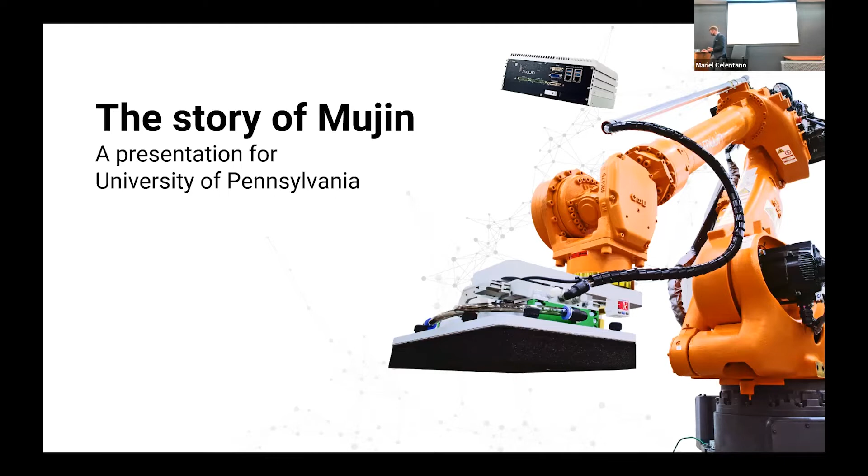Today I want to talk a little bit about what we do. Here's the list of things I want to cover today: what we do, what's Mujin, also our opportunities, and also I have some time for Q&A as well. Some of the talk is quite technical about some of the things we've achieved with robotics over our time. But again, feel free to ask questions anytime.

Just about us, we're a company that's really about making industrial robots for everyone - that's our goal. We're doing industrial robotics. Right now, the state of the industry is that these robot arms are decades-old tech. It's already been developed quite extensively. They're quite state-of-the-art machines these days, but they're not used very widely. So Mujin was founded as a way to make it easier to use these robot applications.

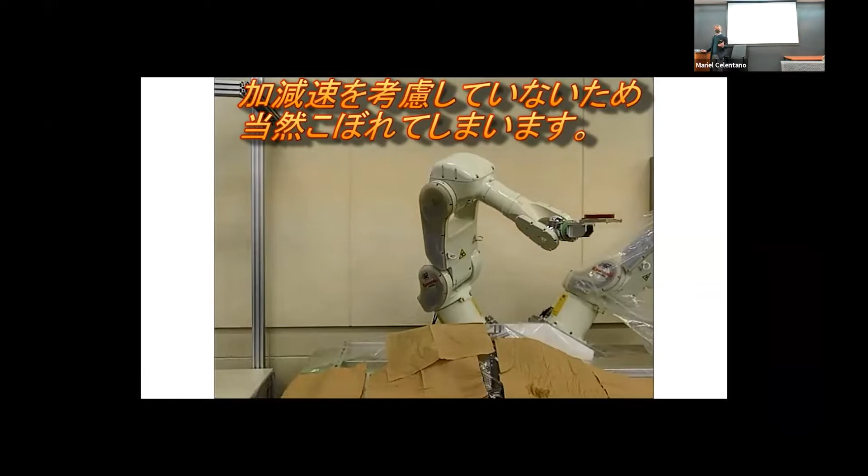This is the kind of application that we're doing. This is a prototype that we did based on the kind of software, the technology we developed. You see how right here, this robot is having a hard time moving this petri dish with water in it. But we were able to make a system - this is the way that we develop software - that can make it move like this instead. It's drastically different because our software automatically determines a motion path based on constraints.

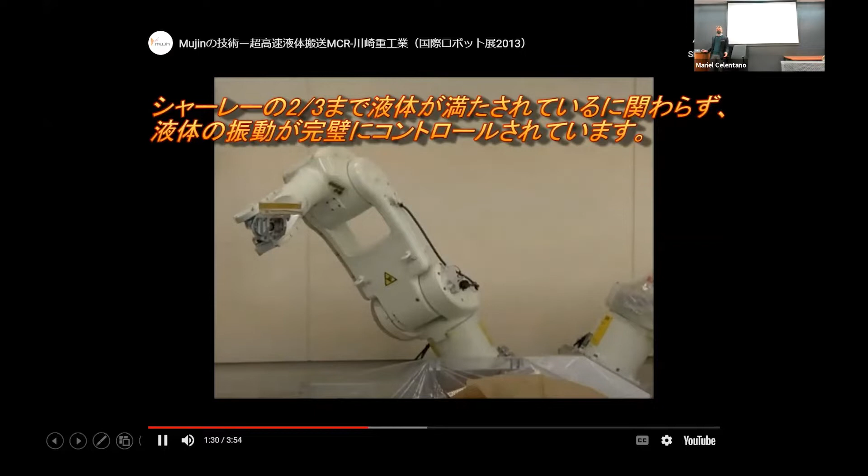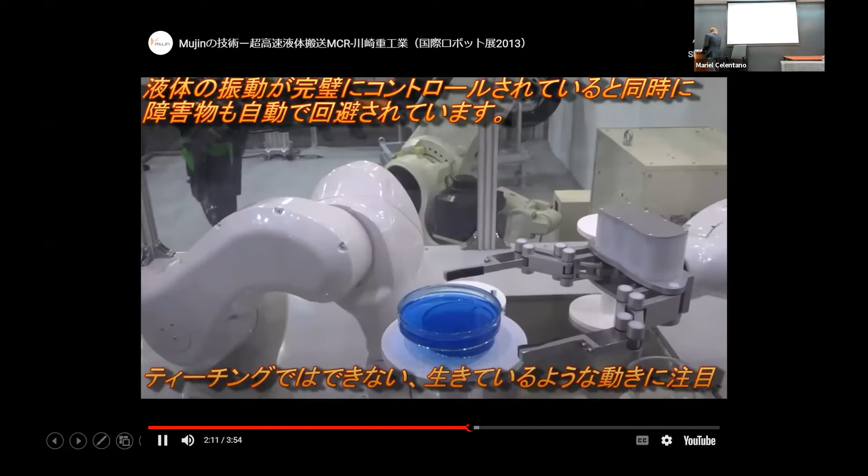So that's just a demo - we never really sold it or anything like this. But we're really about developing automation. This is kind of how we actually had it during one of the expos that we did in Japan, back in 2012, or actually I think it was 2013. But it just shows kind of what Mujin is really trying to do with our automation.

We've done other kinds of robots as well too. I want to move on to the next slide. But first, before I go into that, I want to give a little bit of background about our company.

We're founded in Japan, but founded by actually an American and also a Japanese person in Japan. The reason we decided to set the company in Japan is specifically because Japan's really strong with these industrial robotics systems. The types of applications we're doing involve using robot manipulators, and most of them - especially when we founded the company back in 2011 - about 70% of those manipulators were made in Japan at the time, across the world.

Just about Mujin, our company - the name Mujin has a double meaning. One means no people, and it can also mean no limits as well. That's a little bit about our founders. We want to be able to automate pretty much any kind of system that can be automated.

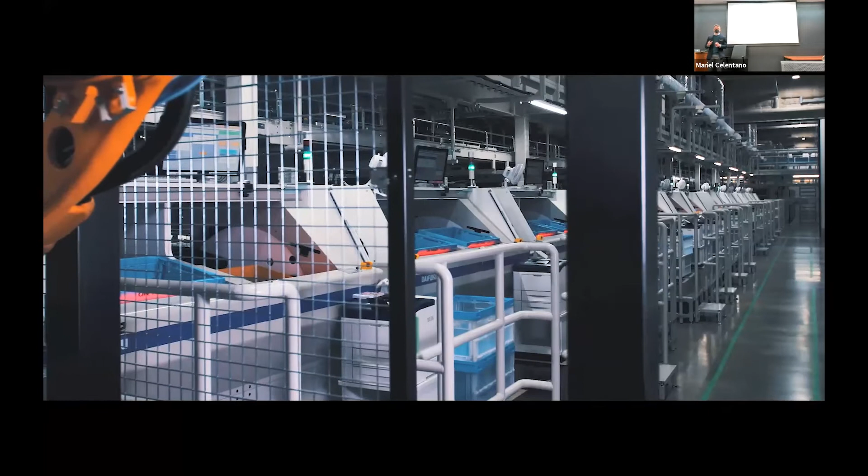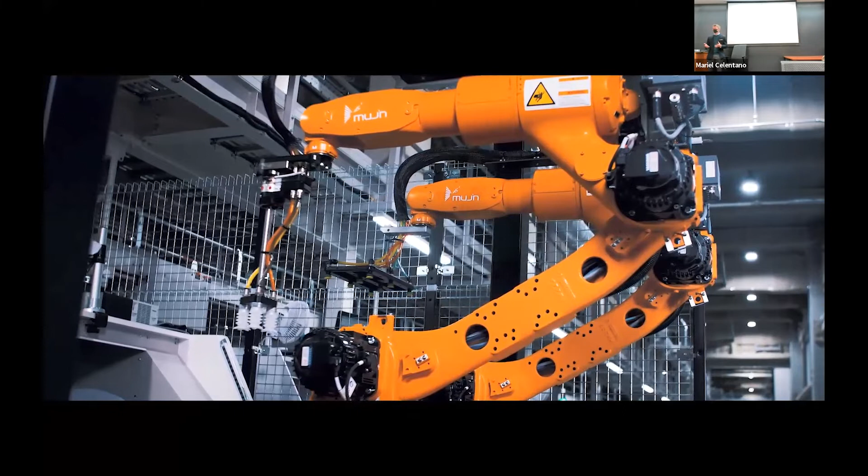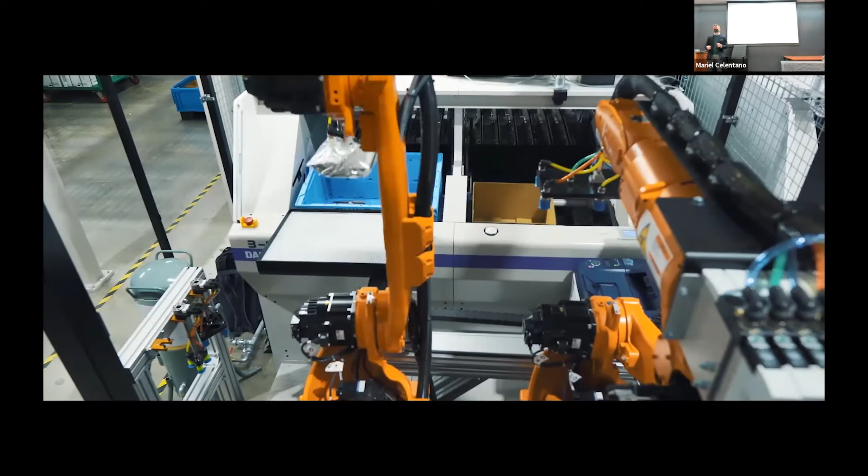This is one video that I want to show you about a type of system that we made for a company called Fast Retailing. They have the brand called Uniqlo, which I'm not sure if you have one of those in Pennsylvania or Philadelphia, but no, you don't have one? Oh, yeah, you do? Clothing store? Yeah, I've been there. You've been there, right? I have a vest from there. Awesome, so it's kind of a big deal in Japan - most Japanese people shop there.

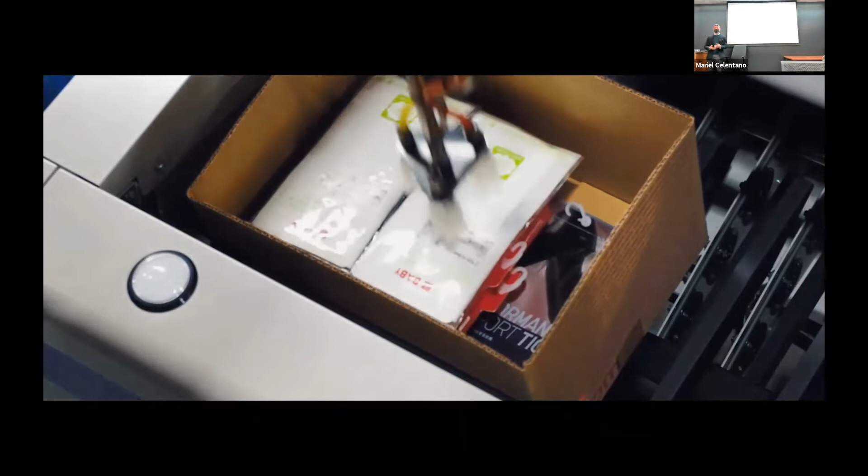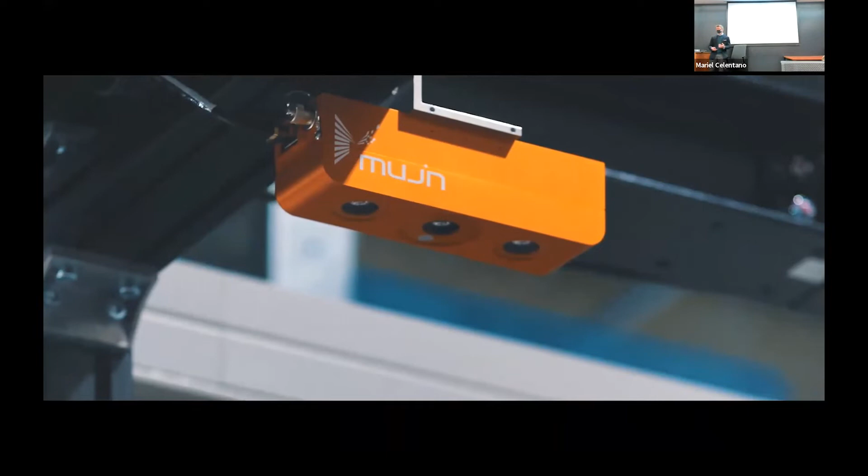They have this job of people having to pick up items in boxes for e-commerce - like you order online, you have to have somebody pack that order for you. So they wanted a robot that could do that job automatically, and we helped them make it using sensors and also the software that controls the motion planning. We've actually been making these kinds of systems for quite a bit, but that's one example of some of the applications we're doing.

Other ones as well too - we developed... yes, go ahead.

When you talked about the application to Uniqlo, like for binning the products that people order - does the automation only take care of it if you place the bins next to the robot and give instructions on what items and which order to make, solving all the scheduling and everything, and then it does the task? Or does it go to where the bins are placed in one place, goes to the bin, picks the right object, and comes back?

So yeah, the issue about bringing the actual items to the robot - that's one thing we've had to deal with. There's a lot of different systems we usually have to interface with, and it depends on the system too. But there's usually a warehouse management system that tracks what is in what bin, for example. And then there are automated conveyors or sometimes AGVs that bring the items to the robot.

What Mujin's platform can do is figure out how to pick up the items and pack them properly. And it can also control all of the automated systems, the industrial automation systems on the scene, including the AGVs and the conveyors, barcode scanners, and all these different sensors involved.

So let me show you this next video as well. Did you see our video about JD.com? It's a big e-commerce giant in China, and we helped them make a fully automated warehouse back in 2017 when we started that project, finished up in 2018.

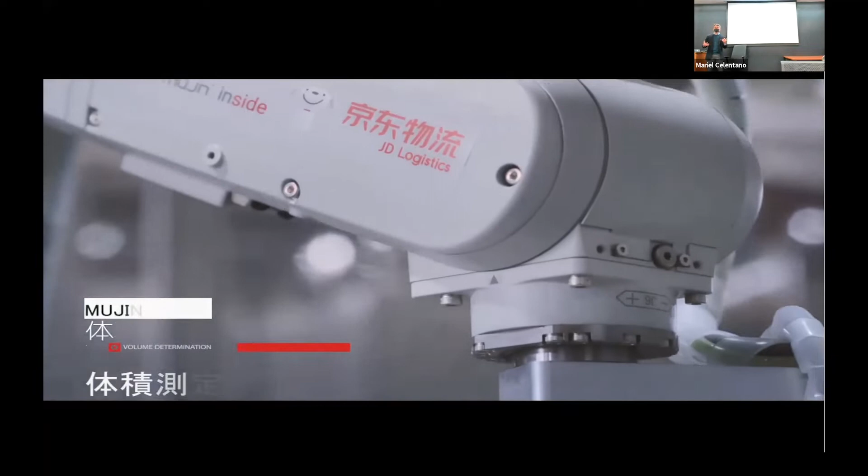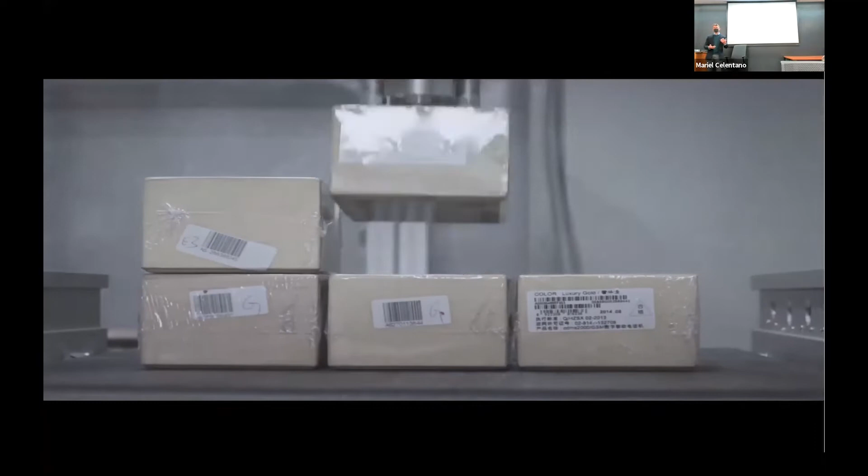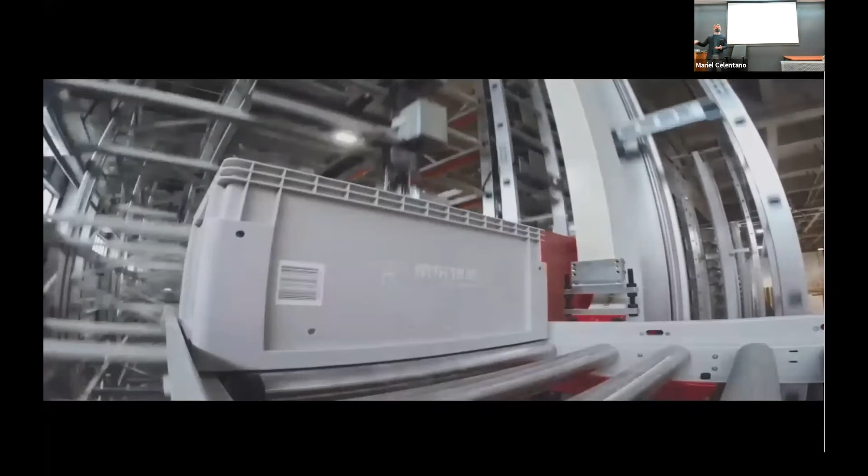This is what it is, a massive warehouse - see the video here? They were already planning on building it out with the latest kind of automation tech for storing all the items, the automated shelving, the automated packing systems, these kinds of things. What we provided was the robot arm that could pick up all the items, put them into the shelving system, take them out, scan them, and then put them into different workflows. So we kind of closed the loop around the automation for this.

Right now, usually this kind of task they were thinking they'd need about 50 people to actually do the packing. But by adding our robots, they're able to make it so nobody has to touch any of their merchandise anymore. So the only people working at this warehouse are 5 people doing maintenance on the machines. That's it - it's the most automated system I've heard of.

Yeah, go ahead. Oh yeah, this seems like a very different kind of system than what I've seen in videos about Amazon warehouses, where you have these small robots picking up racks, and then people have to pick things out and package them.

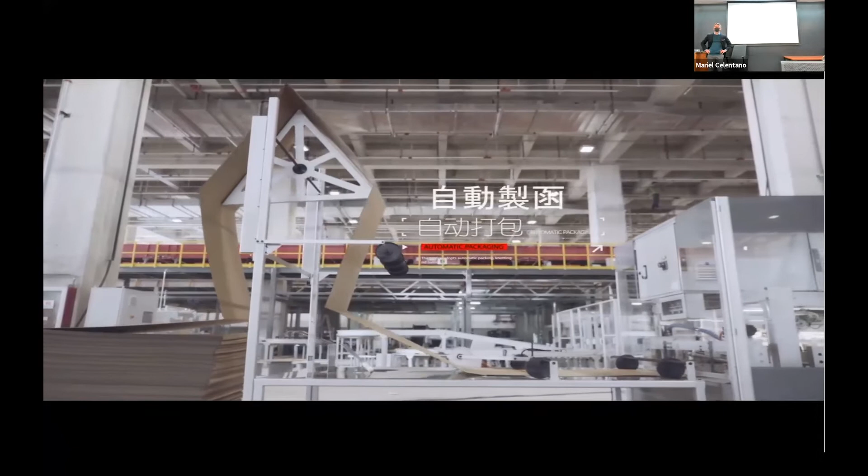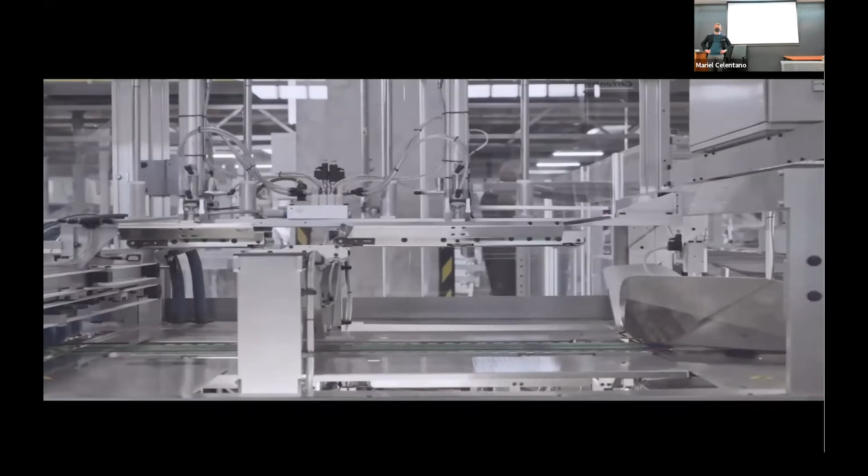Yeah, so what do you think are the pros and cons? I guess in my mind these are two approaches to this warehouse automation problem. So what do you think are the pros and cons of Mujin's approach versus building Amazon's system of moving the items and then having a person pick them out of the shelving, things like this?

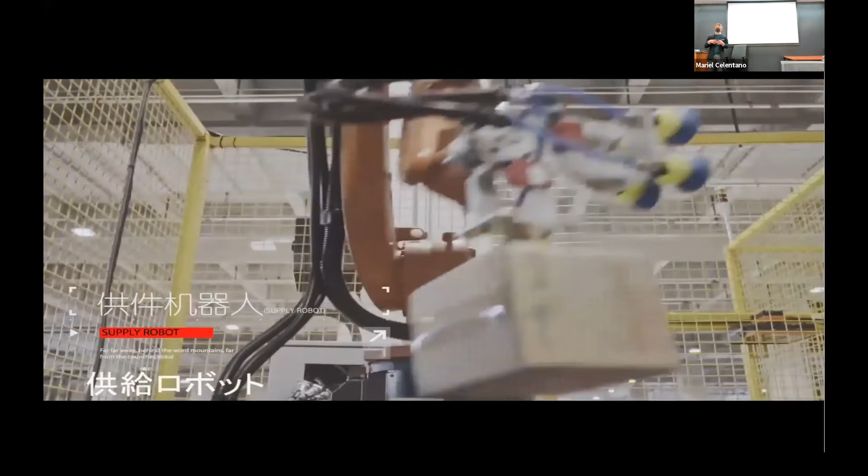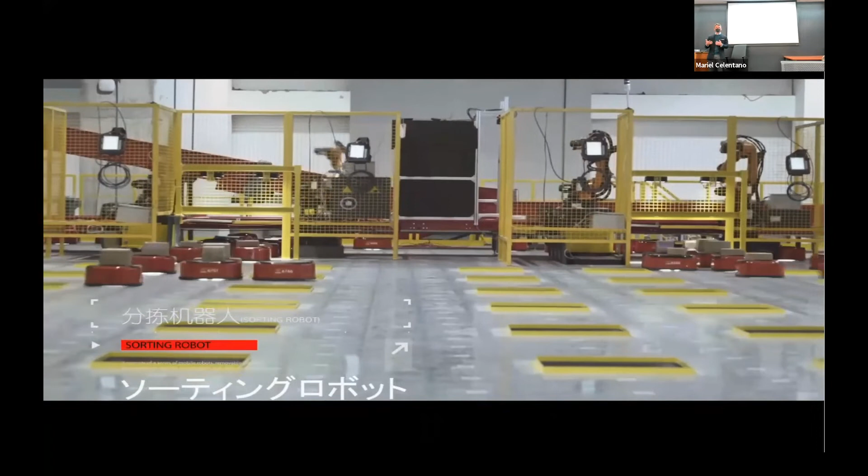I think maybe there's some distinction - for Amazon's system, I understand they have a very different idea about how they should actually handle the items in terms of where to store them, because they don't know where they're going to be shipped from and what's the closest destination. This is information I've gathered from Amazon's video too - I watched like a 20-minute video about what their automation center was doing.

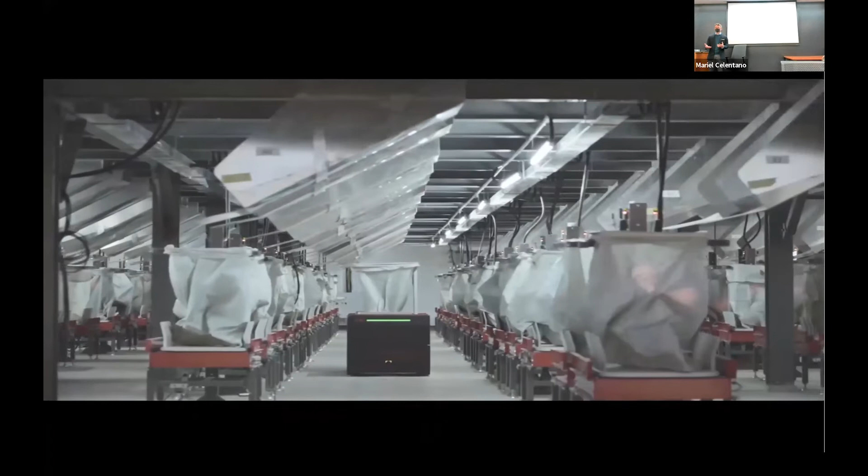Our main goal is to make the system as autonomous as possible, so we can find a way to make it so nobody actually has to handle any of these things - it's all done by machines. That's what we wanted to do. Actually, we didn't have that big of a part in deciding how this warehouse was made. What we were in charge of was just providing the robot application that would make it so they could take those last 50 people out of the process.

So if you think about Amazon's system, right now it brings the rack to a person who will pick and then pack. If we could have Mujin in there, it could do the picking and packing as well. But the automated storage system, that's something really different from what Amazon came up with, right?

Yeah, I don't know that much about the pros and cons. It's a little bit - we focus on the robotic side of things more than the warehouse management side of things.

Any more questions about that one?

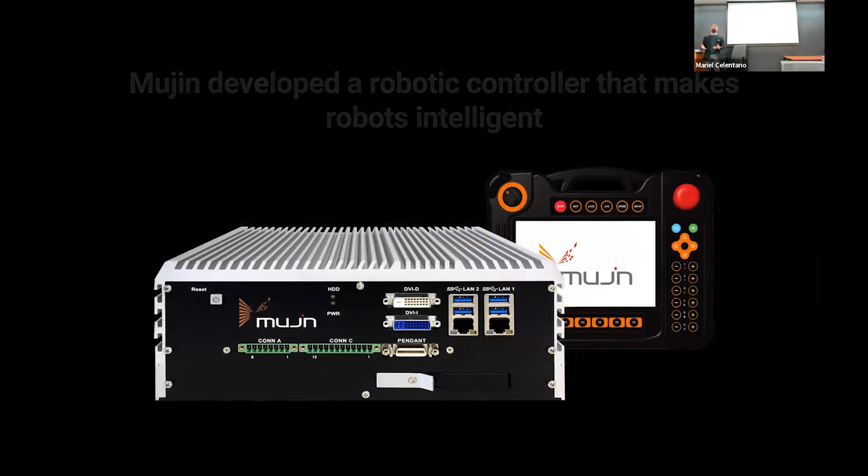Let me go on to the next part, about Mujin, what are our products? I want to go over that a little bit. The reason I go through this is because I know you may know a lot more about robotics than the average person, but I do this presentation for lots of different audiences, and they want to understand what it is that Mujin actually makes.

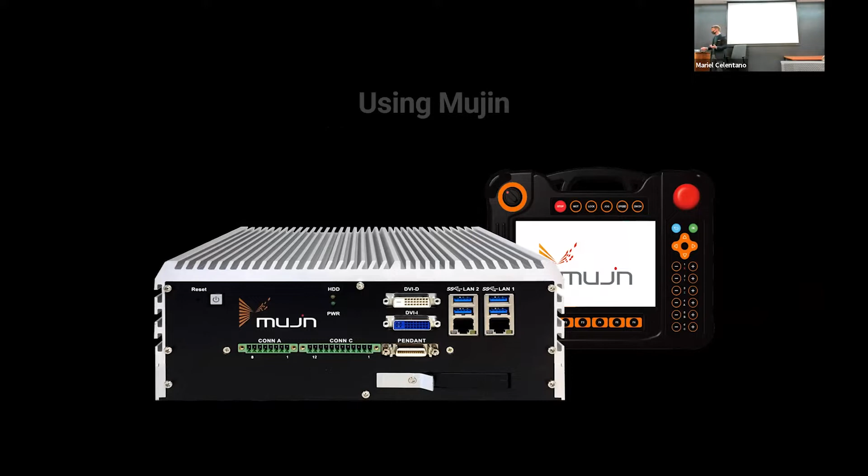What we actually make is a controller that we're able to connect to any kind of hardware, and also automate the systems that are on site. Essentially it can be the brains of the robot, so that it can decide by itself how to do it, and it uses sensors as well.

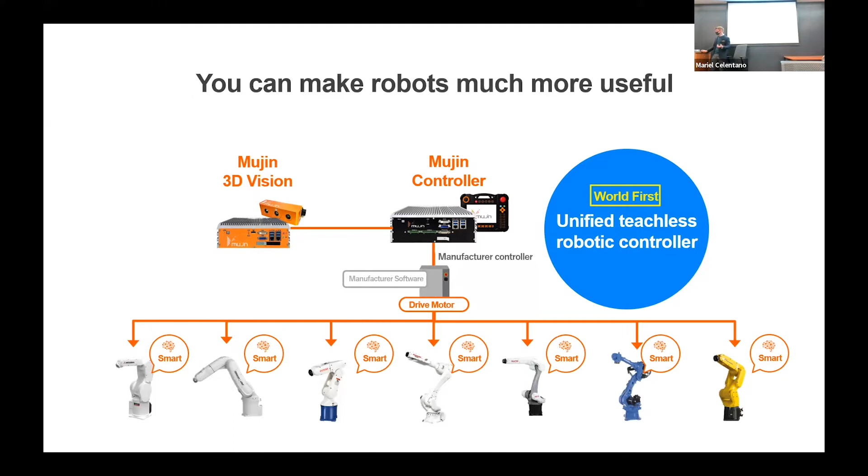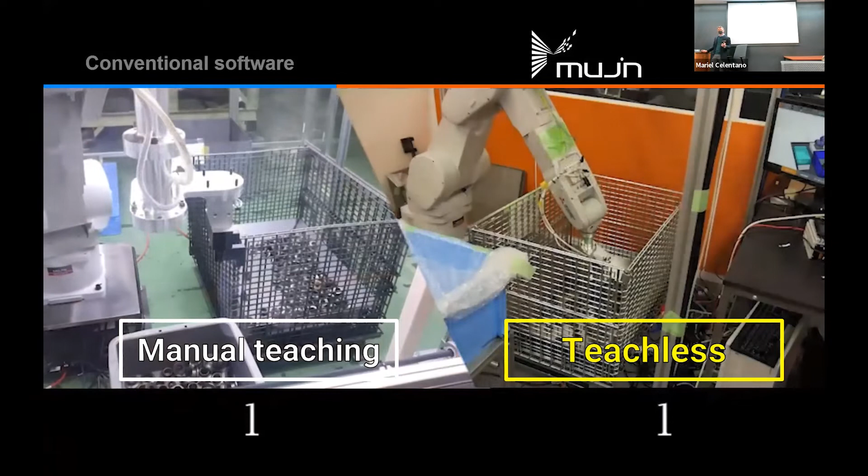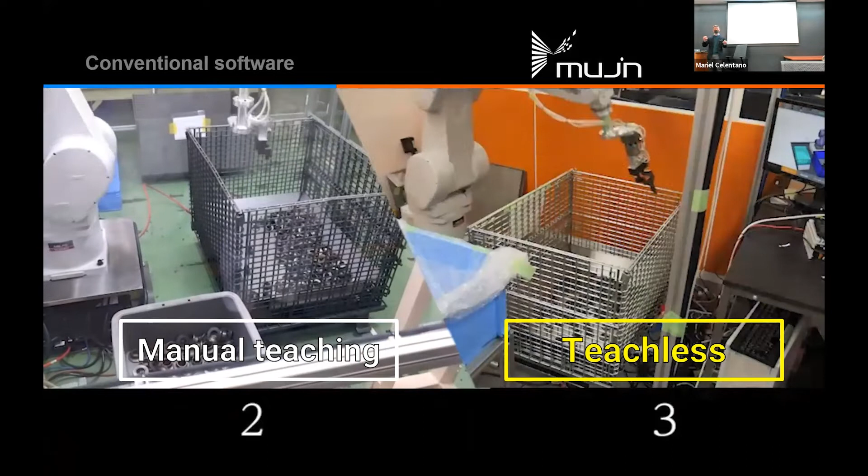The key thing about how we automate the robot manipulator is that we use this technology called teachless. If you're in the industrial automation industry, what people are actually doing to make these robots work is they'll program the robot to move from point A to point B, grasp something, put it down over here, or move the robot over here, make a weld, these kinds of things.

Maybe you've also seen with cobots, you can sometimes do that just by pressing record, moving the robot, pressing stop, then pressing play, and it'll just keep doing it again and again. So what our system is able to do is provide better performance than these traditional methods of robotic programming, because of the algorithms we're using, and that's the reason why they're faster. We call that technology motion planning.

So when you talk about these algorithms you use, is there reinforcement learning or some kind of learning involved in the design, or is it more of a theoretical, control-heavy approach? That's a good question.

Our system is actually a model-based control system. Of course we're simulating everything, and there are some reasons why we don't use so much machine learning in our system right now — I can tell you more about it later. Maybe as I talk more you'll understand a little about the challenges we have to solve and why we chose not to use machine learning for the majority of things. Having said that, we do use a little bit of it, but not that much.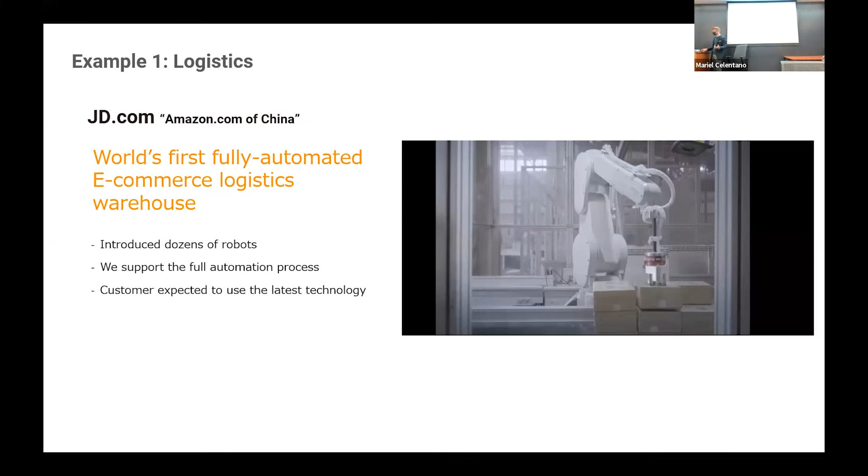So this JD.com example is one — I explained a bit about the benefits that provided. I also want to show you one of these applications that's selling very well right now, which is around palletizing and depalletizing. If you know what a pallet is in a warehouse, you put boxes on the pallet or take them off — that's what these applications are.

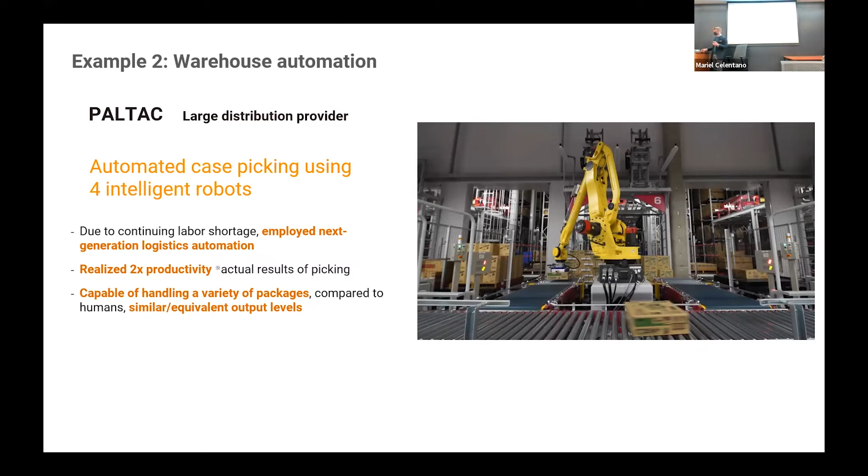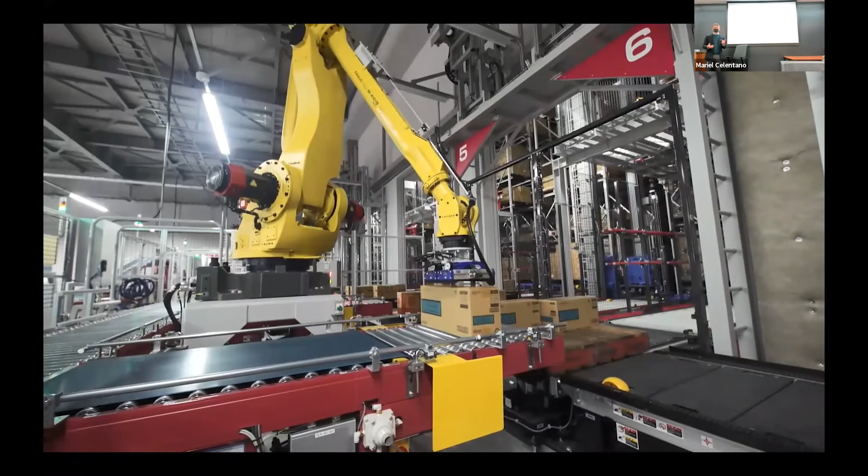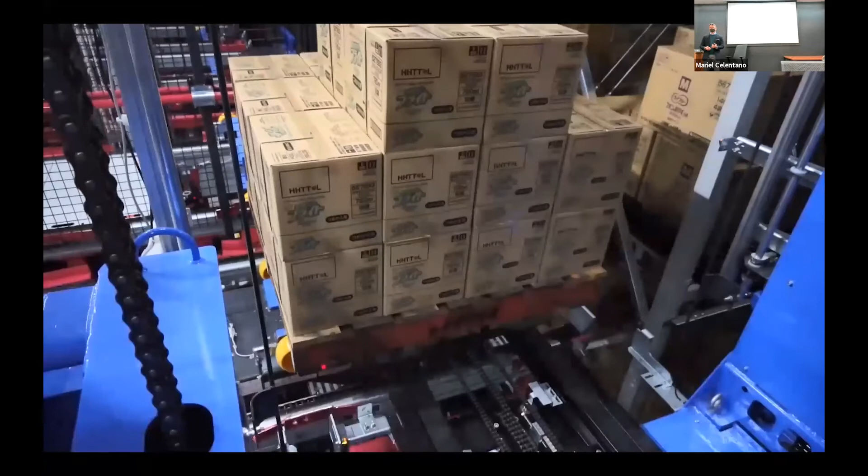We've actually gotten really famous in Japan for these kinds of applications in industrial warehousing. This video shows a company that's a warehousing services provider. They service major grocery stores in Japan, and a person can usually do about 400 of these boxes an hour, working really hard — it's backbreaking work, and sometimes it's not heated or air conditioned. This company in particular was having a hard time keeping people on the job doing this kind of thing, so they asked us to help out with robots because it's a no-brainer for them — they need the job done and there's nobody to do it.

Our system does about 600 to 650 boxes per hour now, so it's really replacing people. It works 24/7. Another important thing is that as people take breaks, lunch breaks and things like that, there's a flow of items around the warehouse, and with our system the flow is much more stable — there's no need for any buffer space. So it actually increased the productivity of the entire warehouse quite a lot.

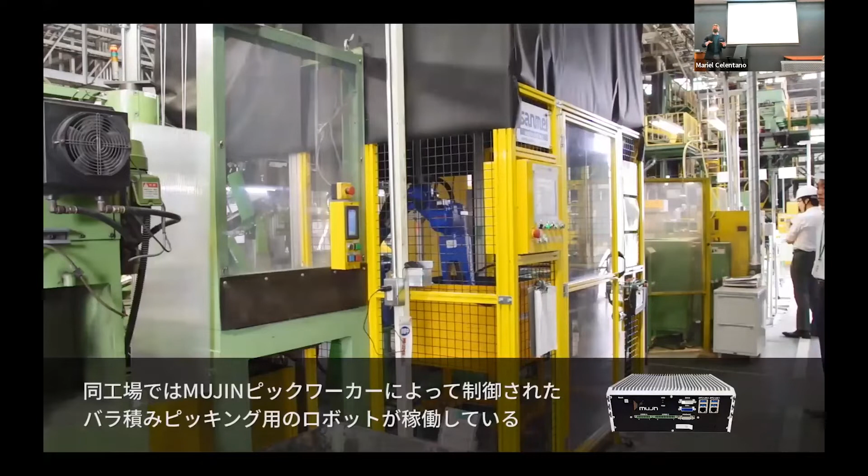Another typical application is around factory automation. This is one that we solved quite a while ago. This is a manufacturer that makes valves, and what our robot does, let me show you the video here. There's a box of these pieces, and what the robot does is pick them out—they're just scattered inside the box—picks them out, puts

them into a jig, and then that part goes further into the manufacturing process. The nice thing is that people don't have to do this job anymore. It's an incredibly boring job, just picking up parts and putting them in some other place. They were able to reduce the cost of making the parts by 25% by using this kind of robot.

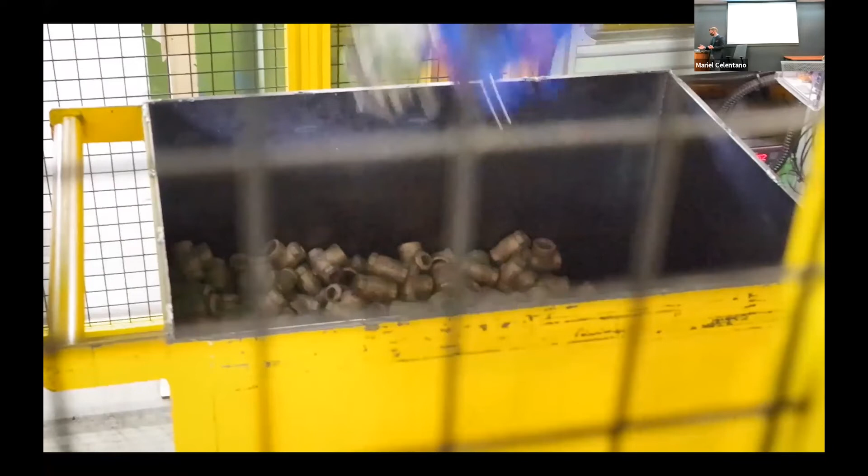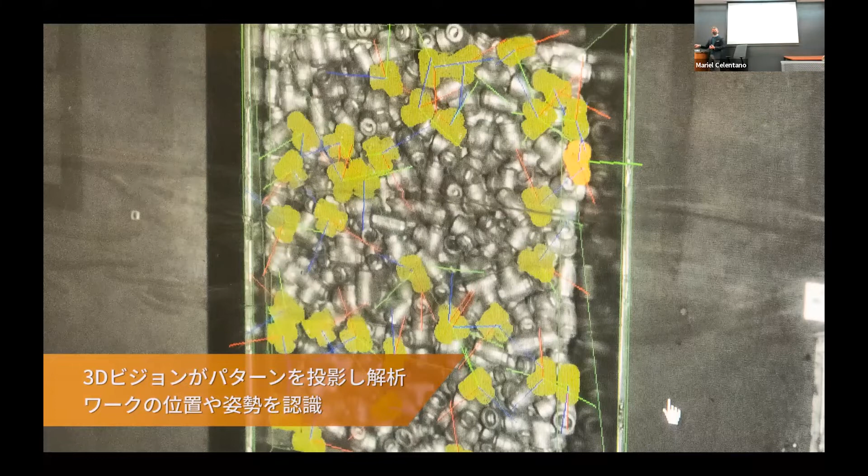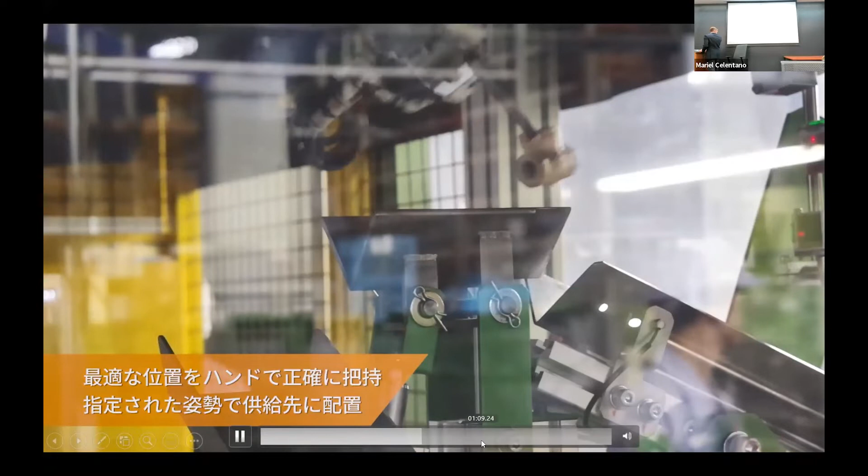So this video right here shows what we're doing. It also shows some of the computer vision that's used as well. It's scanning the items, and then there's a part—this screen right here shows what we're getting for the detection of each object's pose. And then in a few minutes, let's see if I can fast forward—the interface for the system here, which is also showing an animation of the machine state.

So I mentioned model-based. Yeah, go ahead.

A quick question: do you make the hardware itself or do you mainly work on the controller software? We mainly work on the controller software. And so that's why you use Yaskawa here? Yes, and Fanuc in the other one, yeah exactly. We're compatible with most major manufacturers.

Anything else? Okay, so the reason why we decided to make this company and focus on this kind of software for robots is to solve these big problems around using robot arms and making them easy to use in real industry.

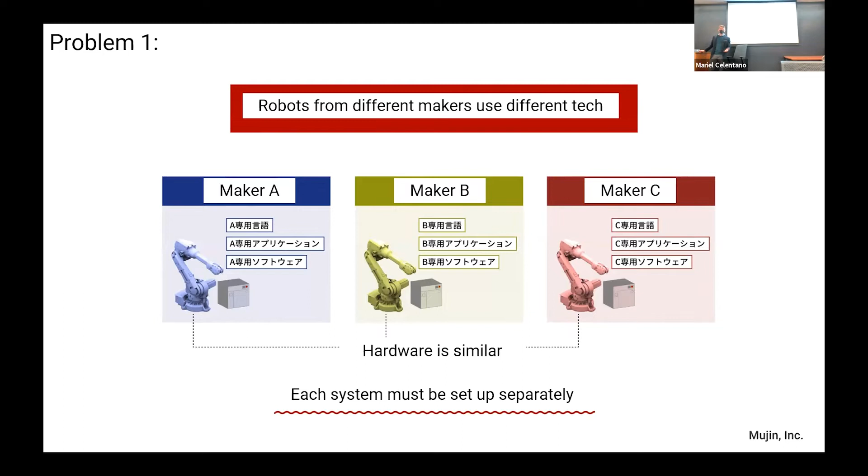What really happens is that each of these manufacturers have different programming languages you have to use to be able to make them work. So different skills are needed to set them up, which makes them hard to use. It also takes a long time to teach these robots how to actually do it—it takes a specialist to be able to do it. Adding sensors to make them more autonomous is even harder of a task, and it's difficult even for robotics experts.

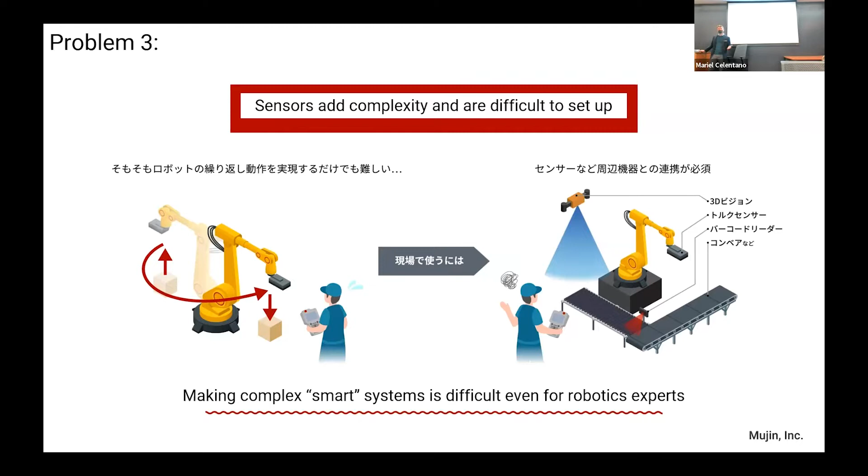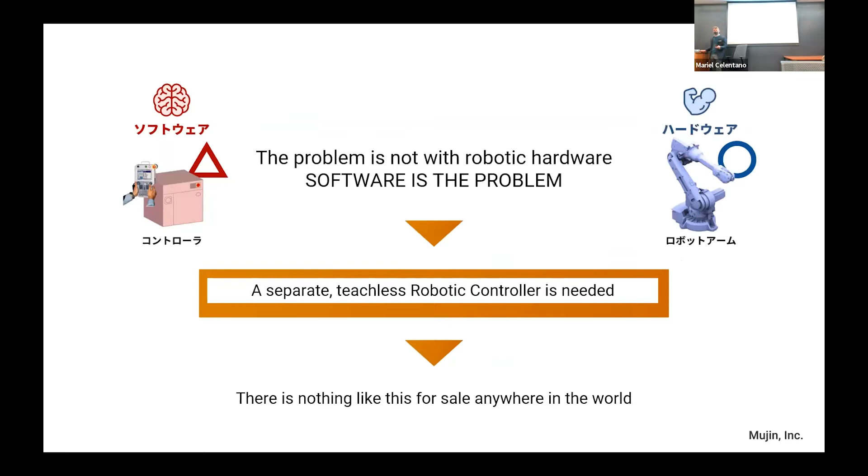All these things have the same thing in common, which is the controller itself. So we set out to make a controller that would be teachless and also integrate the latest technology and sensors to make these kinds of applications real. What our system does is it's compatible with multiple robot arms, it's teachless, and it also includes machine intelligence, which is being able to use the data from the sensors to make smart decisions about the next steps.

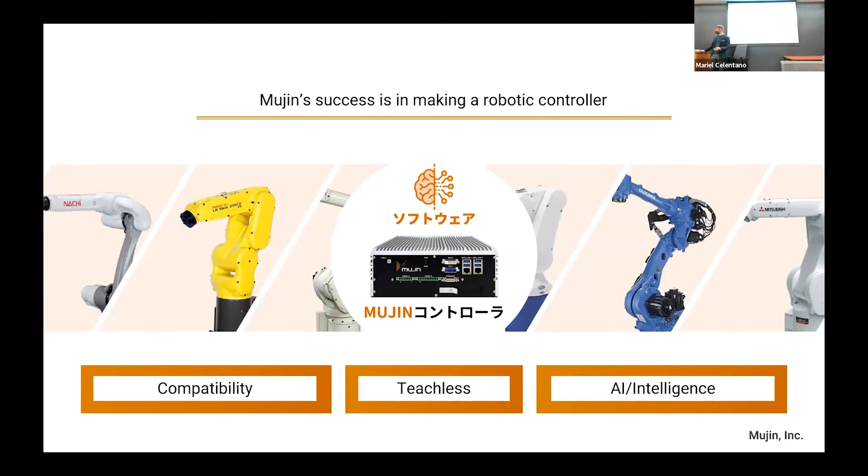So back to this slide as well, which shows what we do—again, making the unified teachless robotic controller. This is the first kind of product in the world, actually. It's doing these kinds of applications around pick and place that, before we invented this system, no other company was able to make commercially viable.

If you have arms with different degrees of freedom, can the same controller be applied? Yes, absolutely. In our lab in Tokyo we have a big variety of robot arms being used, probably about 50 different robot arms from different makers, including cobots as well—a big variety of different things.

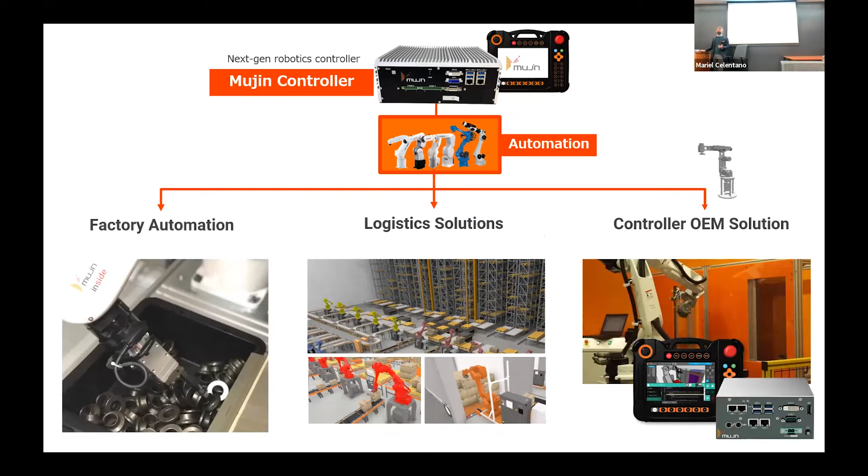So just to recap again about one of our products, there are three main kinds of applications we're really specialized in making right now: factory automation, logistics, and we also provide the software as an OEM for other manufacturers. We've actually sold already about 600 of these systems, actually more than that, to clients around the world, quite a lot of them in the United States, and the majority in Japan and China.

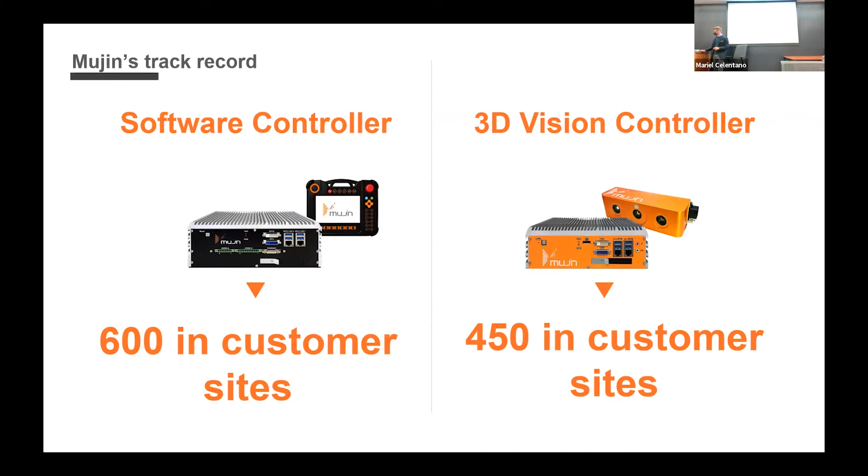So I want to go into a little bit about what happens in our robotics lab back in Tokyo.

Going into our technology, I want to introduce some of the challenges we overcame, and three different things you have to think about. It's basically organized into the teachless system. What is that? And what's the software that's involved in making this kind of system? And then what are the practical challenges that we faced that a lot of people maybe don't think about when making this kind of application.

So just about teachless, the first thing is I want to introduce what motion planning is. When we're making the robot move automatically, we're thinking about how to avoid obstacles. Of course there's the mechanical motion of the robot itself, the characteristics of the device, like how many degrees of freedom it has. The stability of the grip is a big thing too, actually getting the workpiece across. Error recovery and verification, and it has to be goal oriented as well.

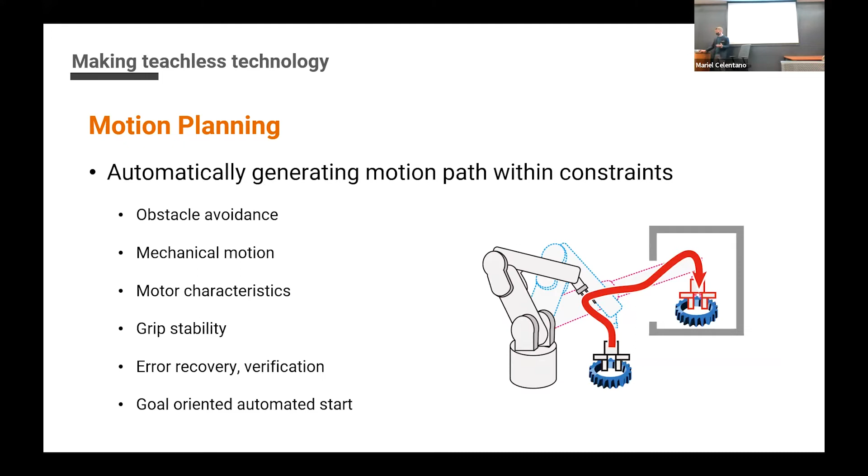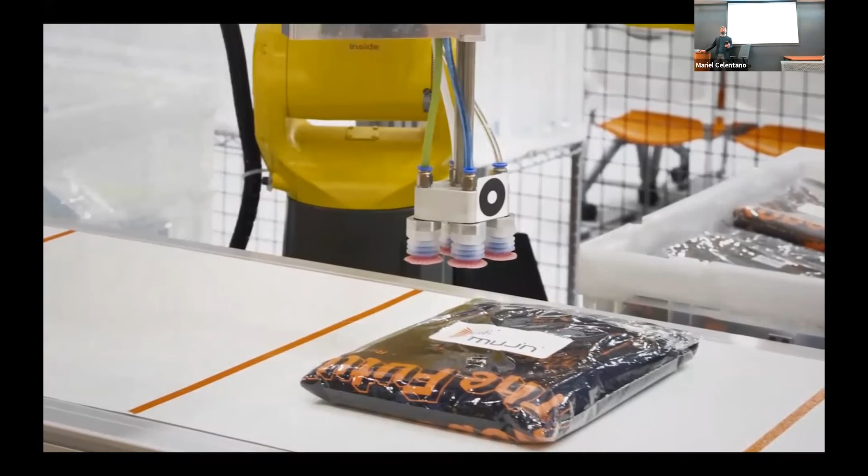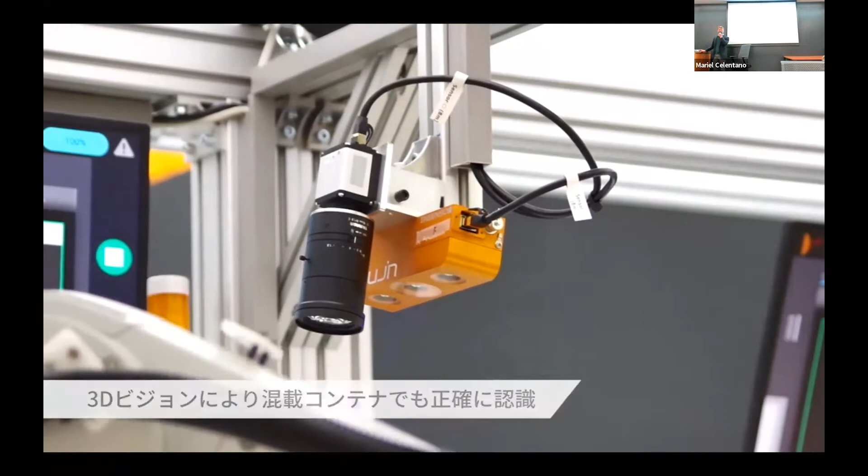You can see here an example of the system. It's picking up things and putting them down very carefully. This is actually a sorting system that we made before. It takes a lot of different kinds of systems to make the robot perform these tasks, and you'll notice one of the things it's doing is putting down the items relatively carefully, not just dumping them.

In practical use, what we found is that clients, if you damage the pieces you're handling, it comes back to them as damaged goods. So these robots have to be really capable of handling things carefully.

This is the killer application we came up with the software around picking things up. What we solved was based on the object position, we can automatically generate and execute the movements. Of course the path has to be executable, it has to keep moving without stopping. Some of our clients even request a performance, like a set number of boxes per hour or per minute. So it has to be fast as well.

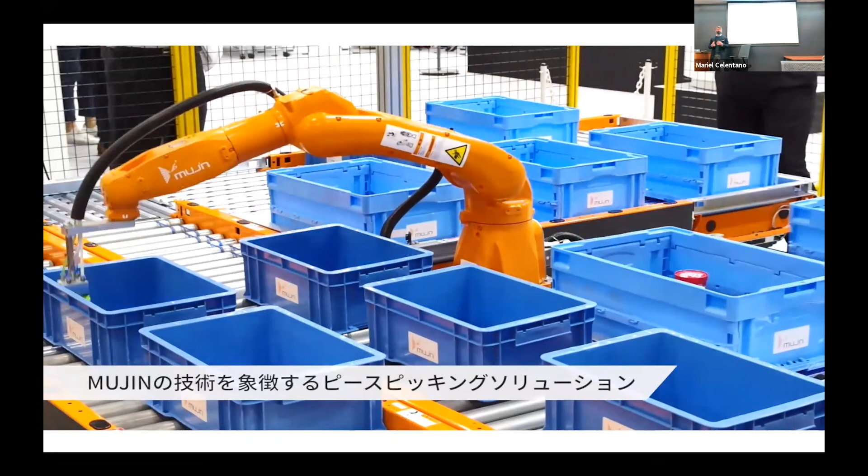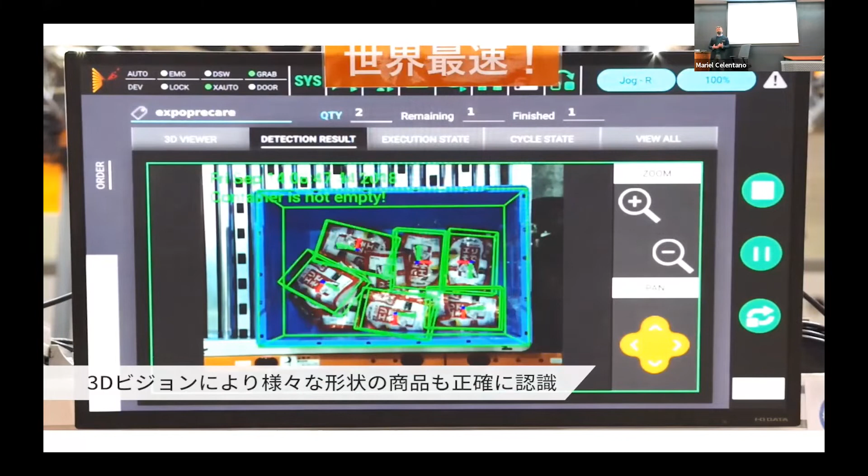This is another video about one of the applications we built before, actually before JD.com, back in I think 2014. There's a major office supply store in Japan called Askul, kind of like the Staples.com of Japan. We were able to do all of this e-commerce order picking automatically for them, using a variety of different things in the totes.

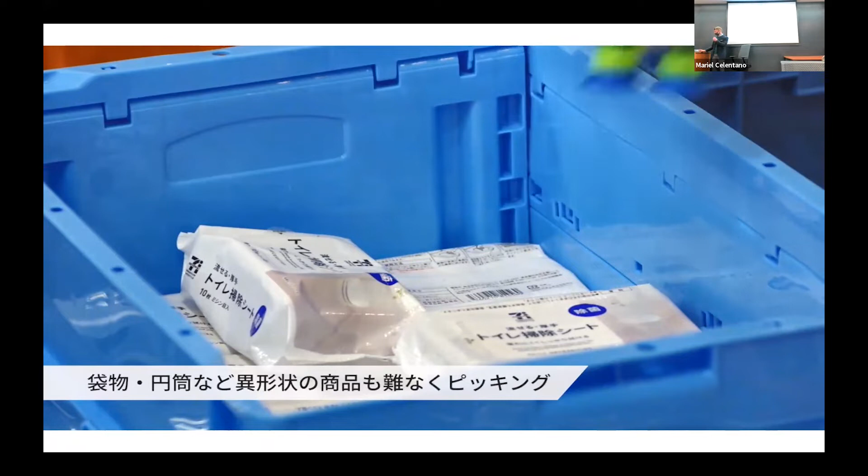One thing about doing these applications in the logistics space is that these picking robots can be used in multiple different areas. What we're seeing right now in industry is an incredible amount of demand for these kinds of systems in America. Already in Asia, Japan especially, it's pretty commonplace to see automation in these areas. I think in the US it still has a little bit of space to catch up to Asia.

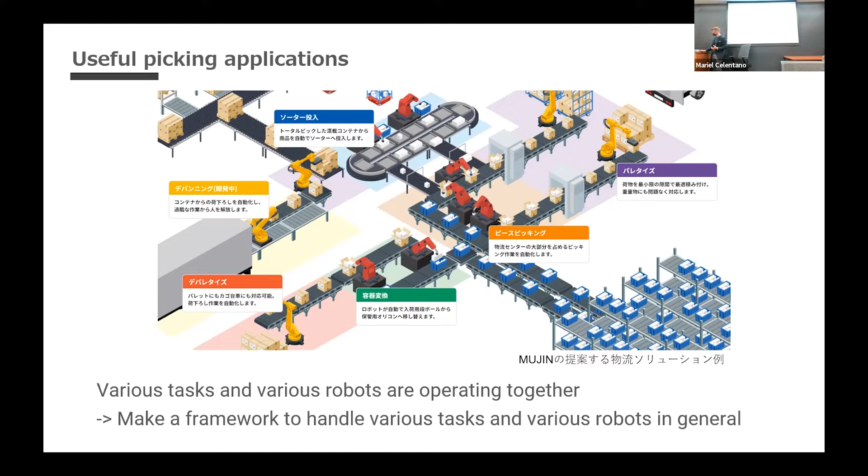But these robots are doing things like depalletizing, palletizing, and picking tasks as well. All these things happen sometimes in even one warehouse, they'll do all these things. So that's the reason why we focus a lot on this kind of application.

Now for different applications like bin picking, palletizing, depalletizing, factory automation, you have to think about what kind of hardware really suits the application specifically, like what kind of things you're trying to pick up or palletize. So there's a variety of different robot hardware that we have to work with.

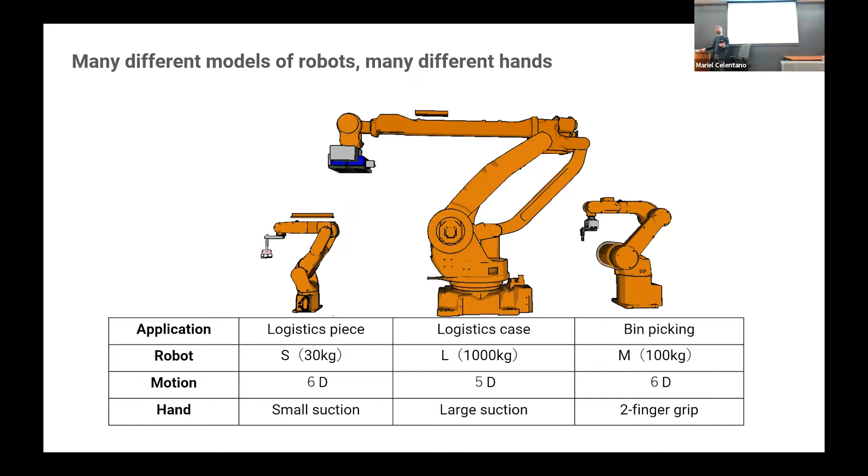We also figured out a way to automatically generate the kinematics for the robot itself, solving a lot of problems there. This system can be used for any kind of robot, and our algorithm has a lot of advantages over other kinds of algorithms out there. The reason we built this is because there are real constraints on the performance whenever we're trying to build applications that are actually useful for clients.

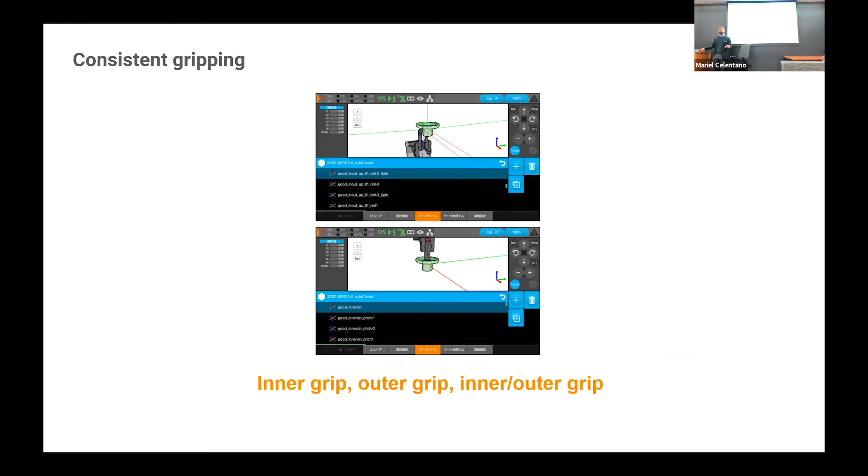Also the gripping as well. There's a variety of different research we've done around gripping, how to pick up items reliably. We have a variety of different grippers depending on the picking application - suction grippers, multi-finger grippers, suction hands - and figuring out how to actually pick them up, which pads to use. We built a system that can calculate and determine these things automatically based on the item the robot sees in front of it.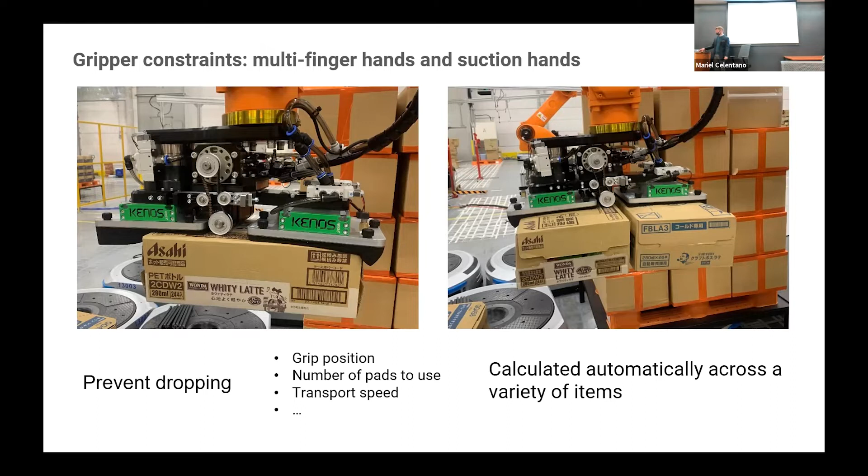Now, just a little bit about the kind of software that we had to build to make this, the kind of logic we built into it. This is an example of a video of something typical of what we do, which is depalletizing this stack of boxes. Notice there are different shapes and sizes of boxes involved. This is a thing that Mujin's system really excels at doing.

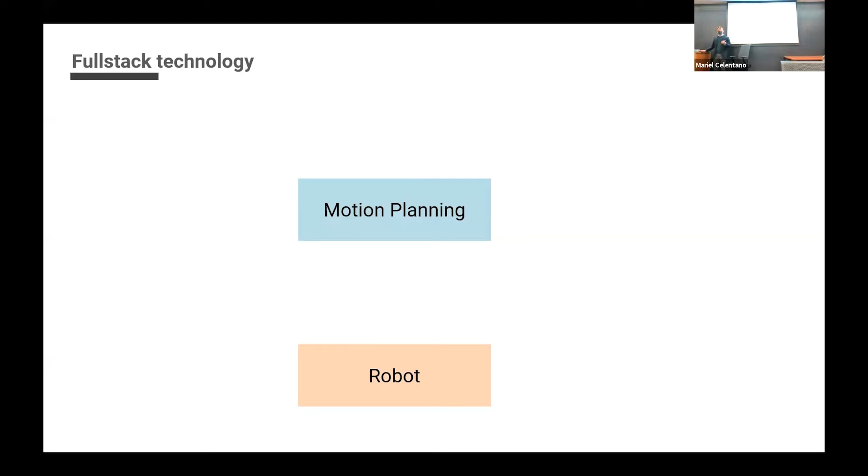But to be able to make this kind of thing, you can't just use a motion planning algorithm and a robot. It actually has to look something more like this - this massive amount of code to be able to make a system that's really reliable and able to perform these functions.

This is kind of the bare minimum, in the vision pipeline. So is the vision pipeline only to identify if there are objects in a bin and just to detect them, to do object detection, or are vision algorithms used for other tasks? The question is what kind of vision algorithms are we using?

At Mujin, we actually have 3 major vision pipelines that we maintain. We of course have a system that's going to identify obstacles in the scene, like identify where the barriers of the cage or the box are, so the robot won't hit them. Then we also have a pipeline that's for identifying the pose of the object and also identifying the object itself. So it goes beyond just identifying what the object is - we also identify the pose of how to pick it up.

Because you can identify it, but if it's laying sideways when it's expected to be standing up, then there's some challenges in picking it up that way. The robot could damage it if it didn't see where the objects are in the box or on the pallet or wherever it is.

We have a kind of pipeline that uses CAD models of the items, especially for things like the kits example, where it had those pieces it was picking out of the bin. So we have the CAD models, and we have another model that doesn't use the CAD models, essentially.

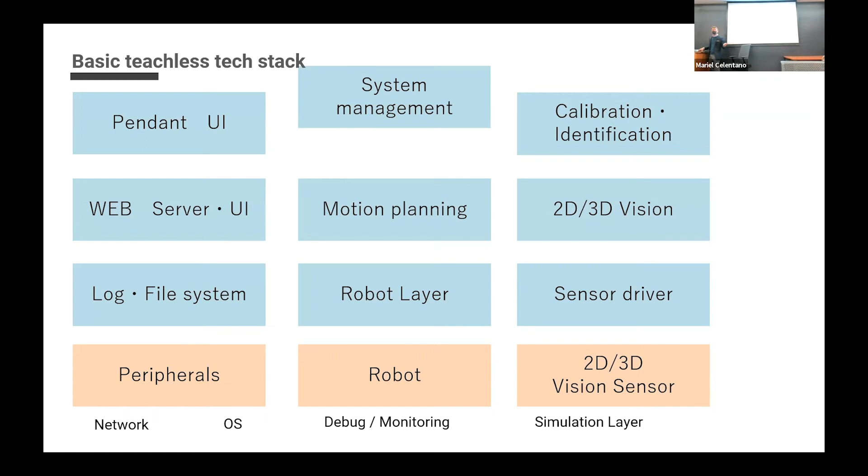Just going back to the software stack, we also have to include all these other things, the base layer as well too. And so we built this really massive system around software at Mujin.

We used a big team to be able to do it. We have a core team of about 40 people who are just doing the software side. And then we have another group of people who are helping out with mechanical and setting up the robots, integration, things like this as well too.

For example, depending on the item, we might need to tell the robot to pick it up a different way or a different grasp point. We might need to tell the robot to handle it more slowly to reduce the amount of force that's applied to it. Many different things to consider whenever picking it up.

But essentially, it's to be able to move the items between the boxes or put them in places safely. And so this is an example of our robot that's what it's actually doing here is it's encountering an item that it's never seen before.

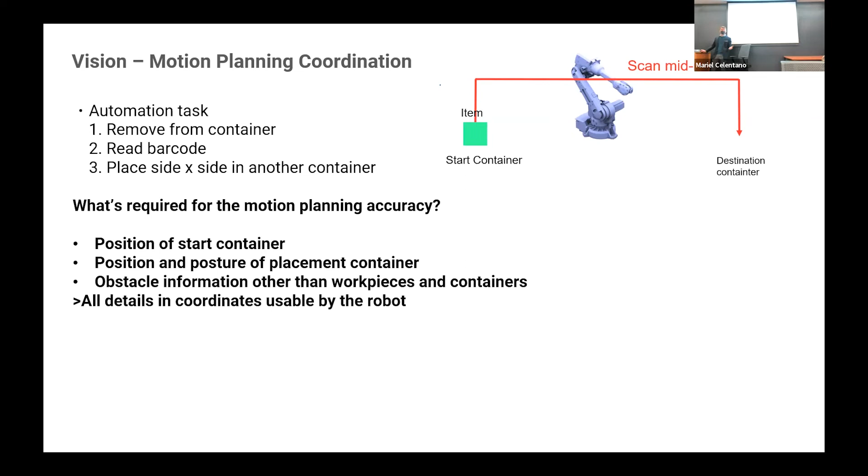And this is an example of the video right here of one where things don't go quite as planned, but we built logic into the system to be able to recover and plan different next steps to be able to make it actually execute the job, which is to take all of these. This is like a kind of sauce that's used for stir fries in Japan, this item here.

But let me fast forward a little bit because it only gets exciting towards the middle. So I think this is like the second or the third one. What you'll see is the robot's actually going to, yeah, there we go. It falls over. It wasn't expecting that to happen.

And so then it detects again, the robot moves itself out of the way so we can do detection on both sides, just to double check everything. And then we build the logic in the system so it's able to keep on packing.

And actually, if you fast forward a bit more, you can see there's a few other mistakes that happen as well too. But at the end of the day, it does what the customer wanted us to, which is to finish the job of getting all the boxes in it.

So building that kind of system is the deep level of detail that we have, the thoroughness that we have to go into. Of course, automatic calibration is one of the things that makes that possible too.

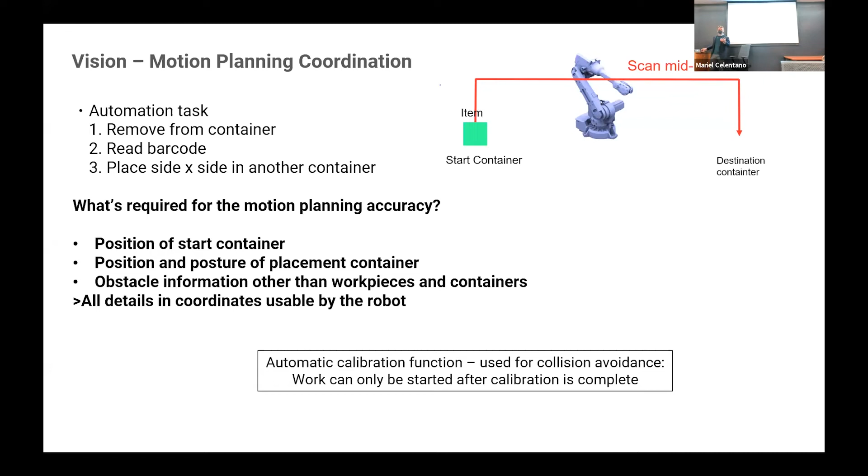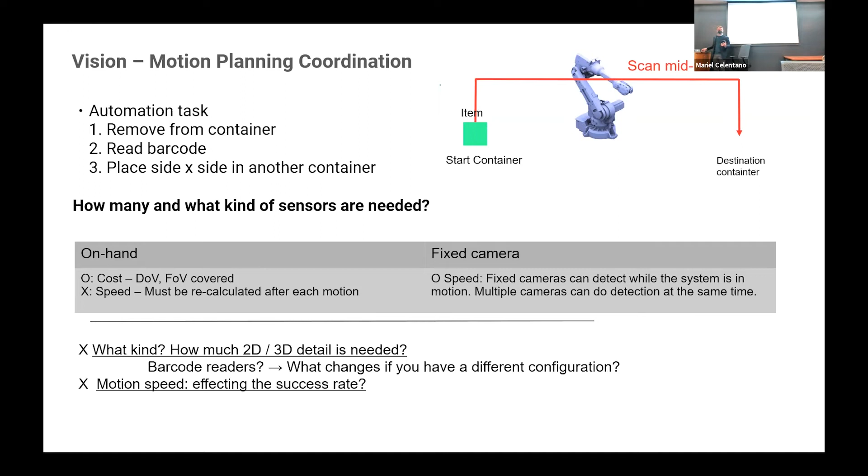Going back to the sensors, there's also considerations about where we should put the sensors, how we should mount the vision cameras, and things like this. How much detail is needed in 2D and 3D. Also the speed of the robot. All these things are really practical for actually solving this problem of packing boxes.

We also built, yes, go ahead. Looks like there's a lot of sensor information involved while doing this stuff, so are you also solving the sensor fusion problem? I see this is a very structured environment, but will there be a lot of errors from sensor data? Yes. How do you incorporate that?

So we do a lot of testing on the sensors before we actually deploy them, and that's one of the things we have to build as well. There was a pretty big project we did for Uniqlo a few months ago, where they were going to have about 10 sensors installed in the warehouse. At Mujin, there are some manufacturers we like using because the cost isn't too high, and because we know the kind of software they're using. We built drivers and interfaces with them, we like the data they give us, so now they're our biggest partner essentially. We're buying the most sensors that they're making, and they made Mujin specific models for us.

Whenever we were setting up that warehouse, we had to go find out what the errors were, the unique properties of each of the lenses. So we set up all the cameras one by one and calibrated each of them, then took them apart, shipped them to the client's location and installed them, so we'd understand the unique parts of each sensor, reducing the problem of having to do it on site instead of in the office.

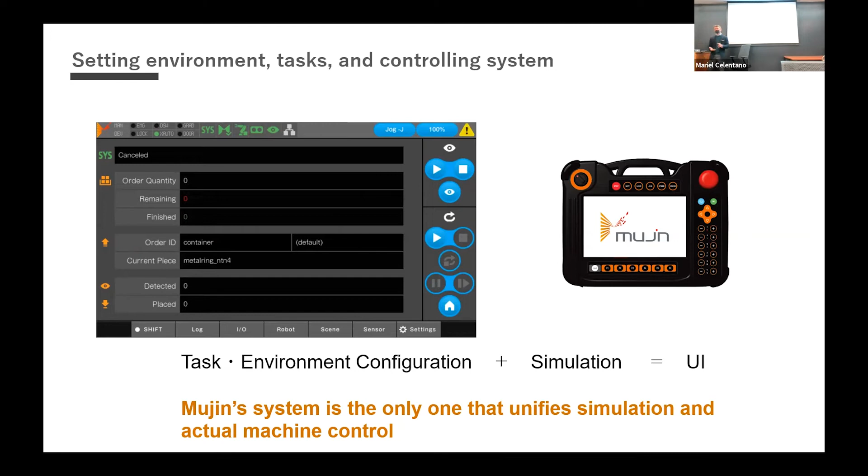So back to the UI, this is actually one of the areas where we're innovating a lot. The reason we want to make the UI better is so we can make the setup time even faster. We want it so that eventually, even if you're not a robotics expert, you should be able to set up a robot, because that's going to make it much more accessible and less expensive to use. So we're doing a lot of research into UI right now.

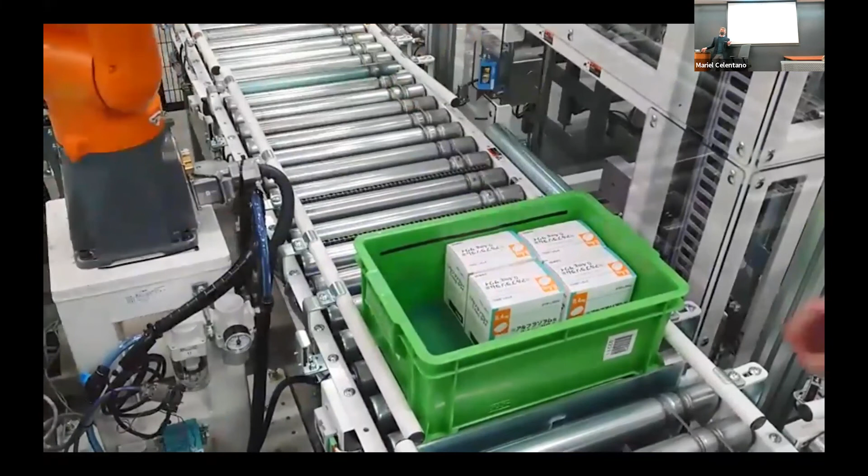And then practical discussions, here's an example of one of the things the robot does. Going into things that are unexpected, we have a person being a little mean to the robot, moving the box after it's already done the detection. He moves it, and then the robot causes a collision. Our typical recovery from that is to actually just stop and wait for an operator to come check out the scene, because we want to see if it's broken or not. If the robot's broken, it can't continue, so we have to stop in that situation. But in different situations, there are different ways of doing recovery.

Did that answer your question you had earlier? Yeah, sort of. Okay, well, just about our philosophy for how we actually make these robots.

Our philosophy, this is a hard job making these kinds of systems. But what we want to do is just never give up, continue solving the problem. We have to consider a lot of the real world constraints whenever we're deploying these systems. We're a company that has this idea, this theory of making it, but then actually doing it and trying it out in the real world, we've learned so much from the industry itself.

We found that these systems need to work flawlessly. When our systems fail, for example, the errors we have require an operator to go look at them. We're able to get rates of like 1 in every 10,000, 1 in every 100,000 operations, which is actually what our clients expect. Because if the robot can't do the job without breaking down every few hours, why do we have a robot? You just have to have a person there to do the job instead, right? We're in the business of actually replacing the people from the client's standpoint.

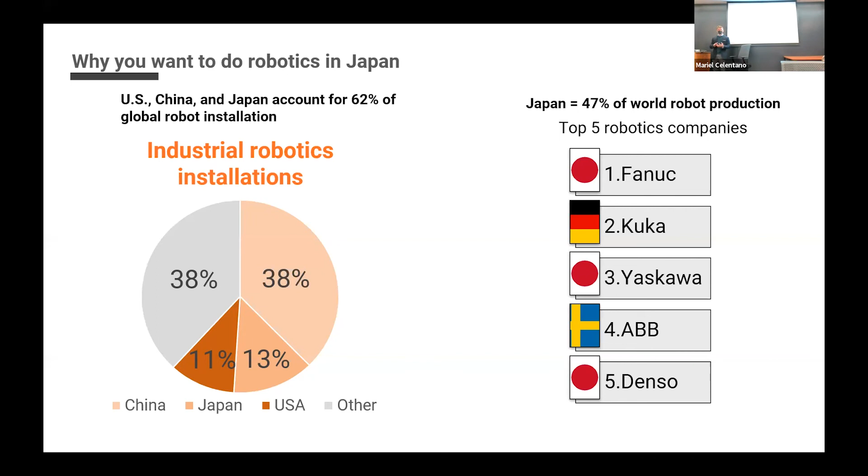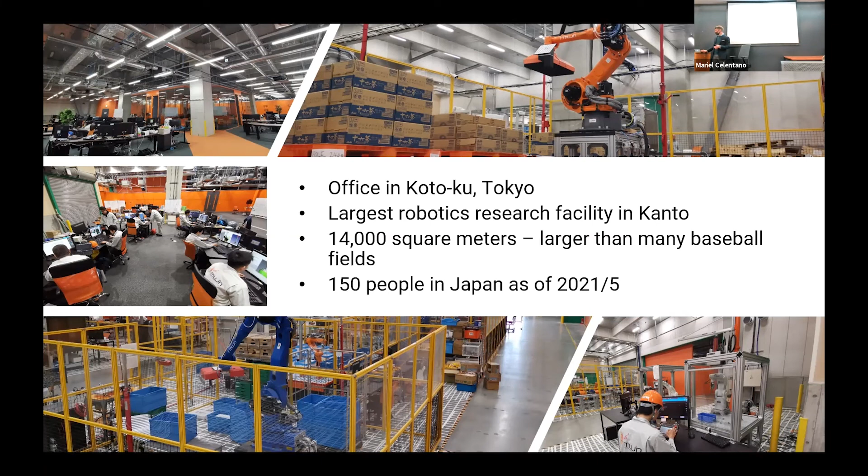It's got about 50 robot arms in different test configurations. We have people from all over the world who come to work with us in R&D, 26 different nationalities, maybe more right now. But they came from some pretty good schools, we've got 4 people from Carnegie Mellon, some people from MIT, Berkeley, and Stanford as well, and we definitely like to have some people from UPenn.

The types of people we hire are people who are really excited about robotics. We have 5 main teams in R&D around building the robotic system, the motion planning algorithms, and the computer vision area. We have a team that does the front end, a team that does the back end and low-level communication APIs, and also a team that does simulation and testing. The simulation side is actually pretty big right now too, and we're looking for some good people there. We have openings that are full-time in Tokyo, and internships in Tokyo as well.

We also have a computer vision team that we're looking to build in our Atlanta office, which we established last summer. Our Atlanta office is 15 people right now, and it's probably going to double in a year's time from now, at least, maybe even more. It's growing really fast.

So right now we're looking for people who can help out with computer vision. Now, to be able to work in computer vision, you don't have to be a computer vision expert. You need to be a person who can work with applied robotics, essentially, is what it is.

We have a really unique screening process, I think, compared to other companies. After having a chat with a Mujin recruiter like myself, or maybe one of my teammates, you'd have an initial tech talk with one of the team leads, and it goes pretty in-depth into your technical skills. Then the next step after that is to actually do a mini project with us.

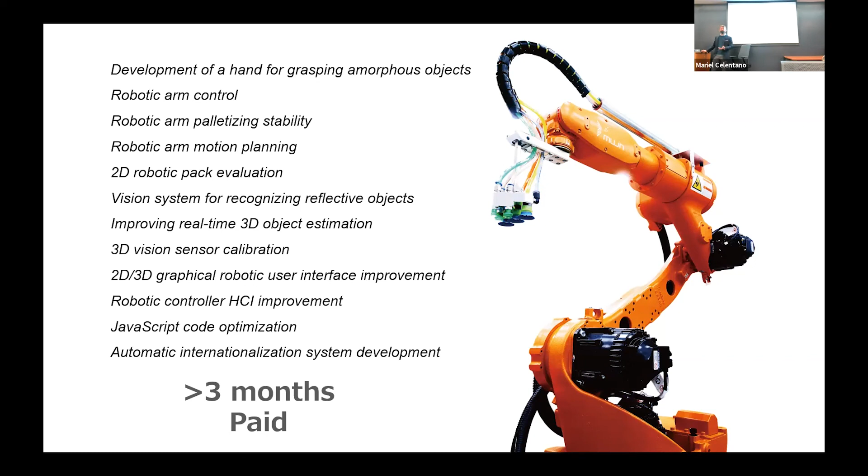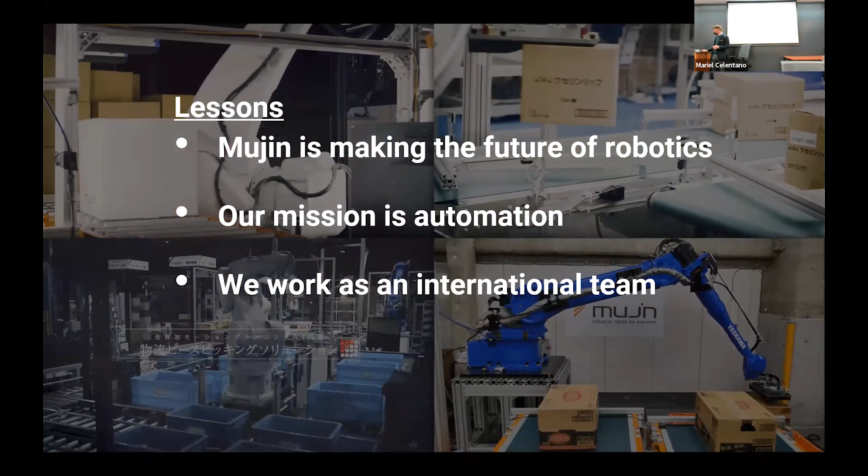So just in conclusion, I want to tell you, Mujin's making really the future of robotics, and our mission is really about automation, and we work as a really international team. So yeah, that's the end of my talk. Any questions for me?

Sorry, it's so long.

You mentioned they have an Atlanta office. So there's openings there as well, or not? We were looking for full-time people in Atlanta. It's a very small team there, only 15 people, so we don't really have the full-time lead there right now who can mentor an intern. So we're looking for the internships to be in Tokyo.

The internships are all on the topics that you listed. There's a few others actually that are not in my list, and in fact, I need to go back and update with the managers about what kind of things we're looking for. But if you have something else related to these kinds of robotics that you want to study, please let us know, because I think we might be able to find some way that we can work together to do your kind of research, and also at the same time make a contribution.